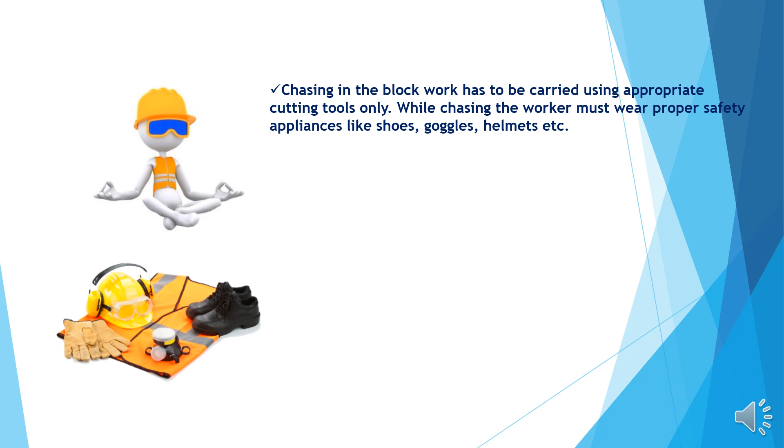Chasing in the block work has to be carried out using appropriate cutting tools. The worker must wear safety appliances like shoes, goggles, helmets, etc. Throwing of debris from height is strictly prohibited.

Before commencement of block work in front of a lift shaft, a safety permit should be taken. CT props to be fixed in front of the lift shaft to tie the safety belt. Hard barricading to be cut only by gas cutting. Personal protective equipment should be used properly.

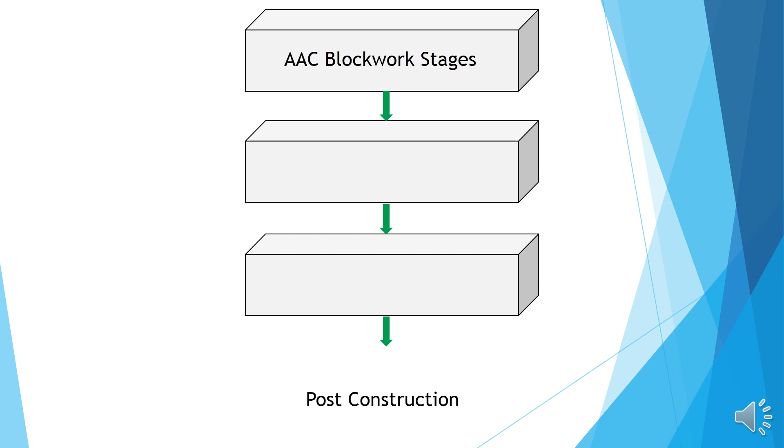AAC blockwork stages: pre-construction, during construction, and post-construction. Pre-construction consists of the following activities: material selection, shop drawings, material management, workman training, and preparation.

Cement, crushed sand, water, AAC blocks, block adhesives - these are all the materials required for doing the AAC block work.

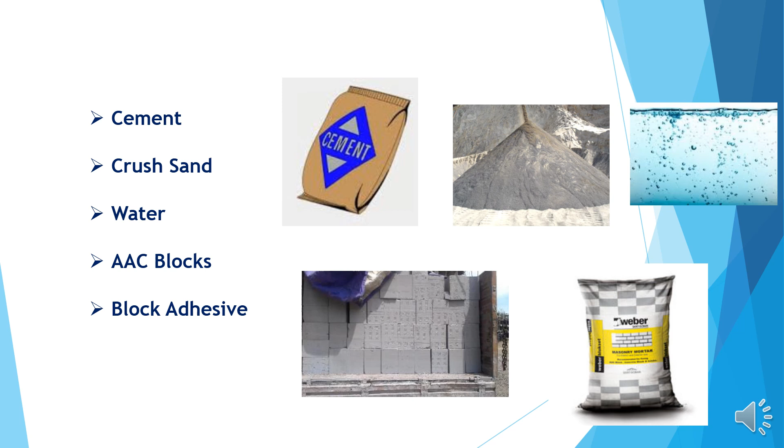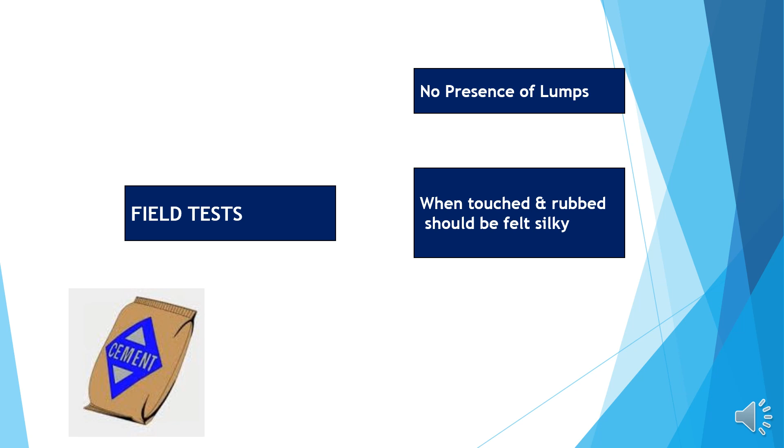Field test for the cement: no presence of lumps should be there. When touched and rubbed, it should be silky. When thrown in water, it should not immediately sink, it has to float for a while.

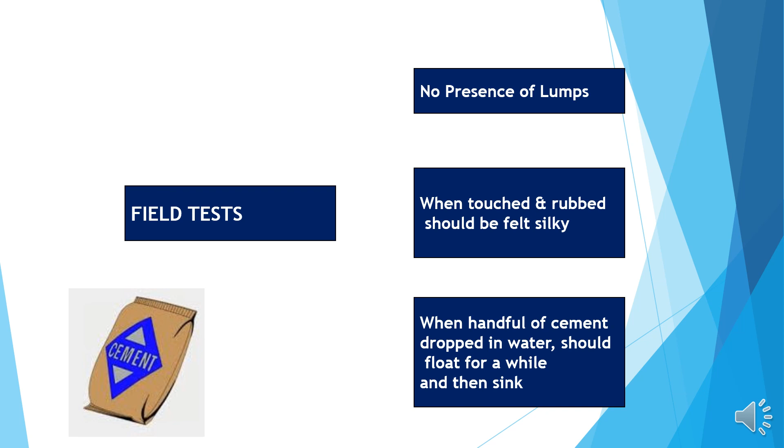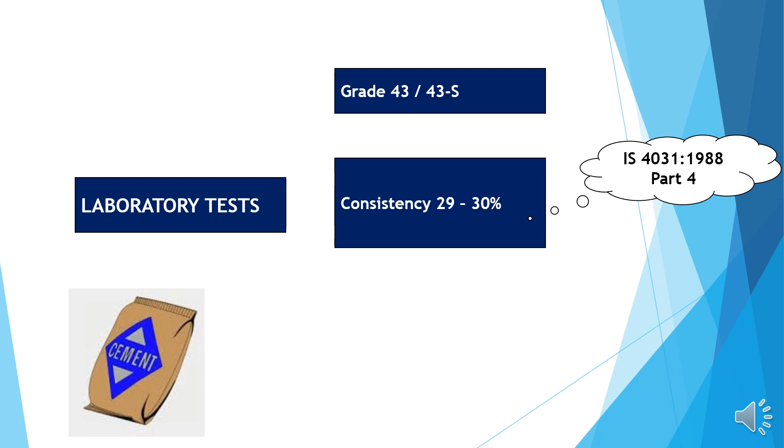Cement laboratory test: Grade 43S. Consistency 29 to 30%. Refer IS 4031 Part 4. Initial setting time not less than 30 minutes, and 60 minutes for 43S. Final setting time not more than 600 minutes. Refer IS 8112 Clause 6 Table 3.

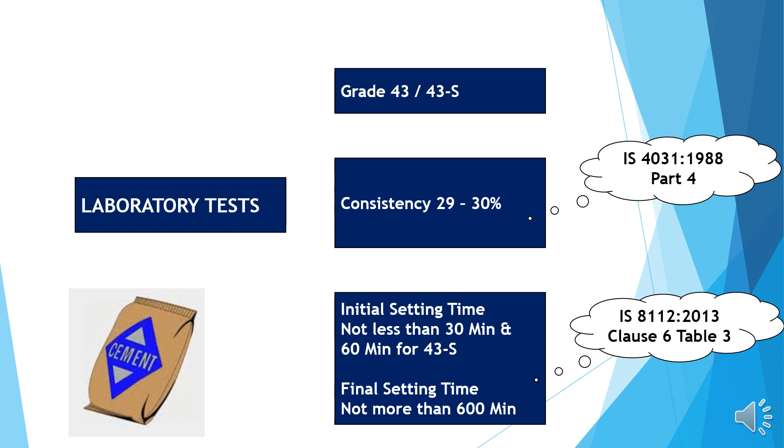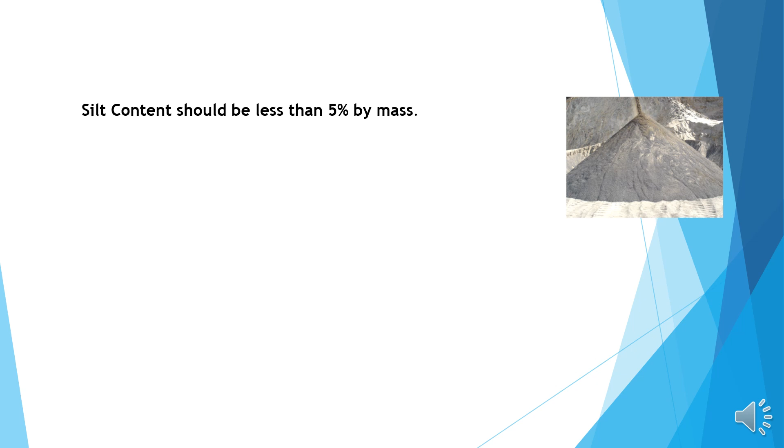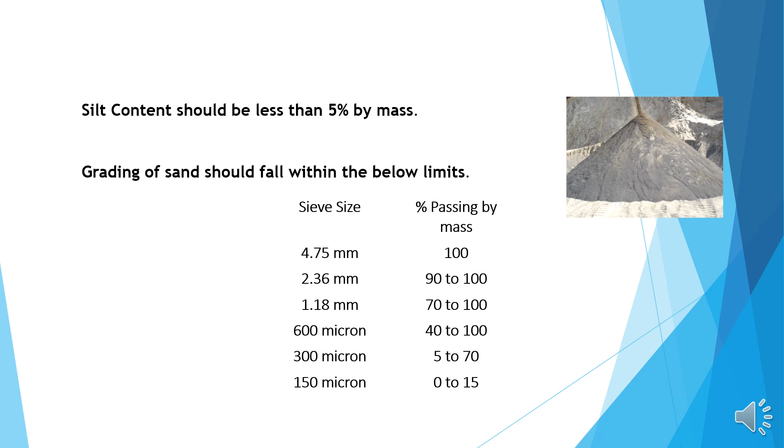Silt content should be less than 5% of the mass - this is crushed sand. The silt content should be less than 5% by mass. Grading of the sand should fall within the below limits: Sieve sizes 4.75mm 100%, 2.36mm 90 to 100%, 1.18mm 70 to 100%, 600 micron 40 to 100%, 300 micron 5 to 70%, 150 micron 0 to 15%. Relevant IS code is IS 2116.

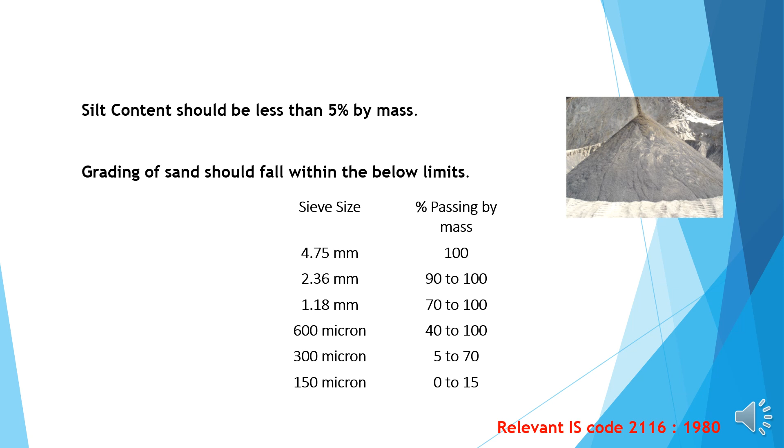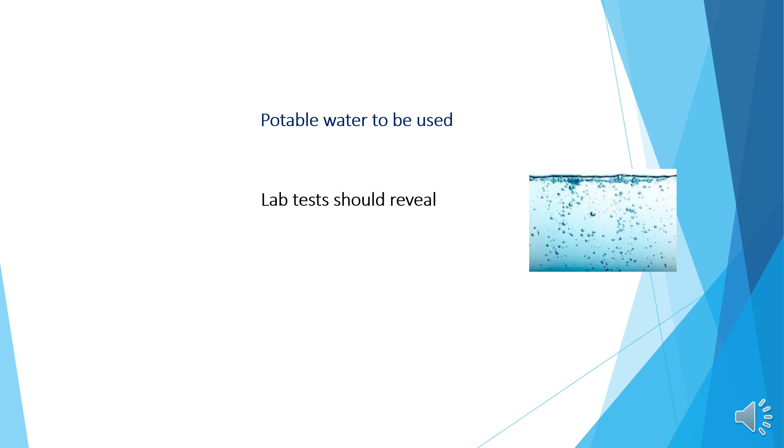Potable water to be used. Lab test should reveal pH value not less than 6, chlorides 2000 milligrams per liter, sulfates 400 milligrams per liter. Relevant IS code 456, Clause 5.4, Table 1.

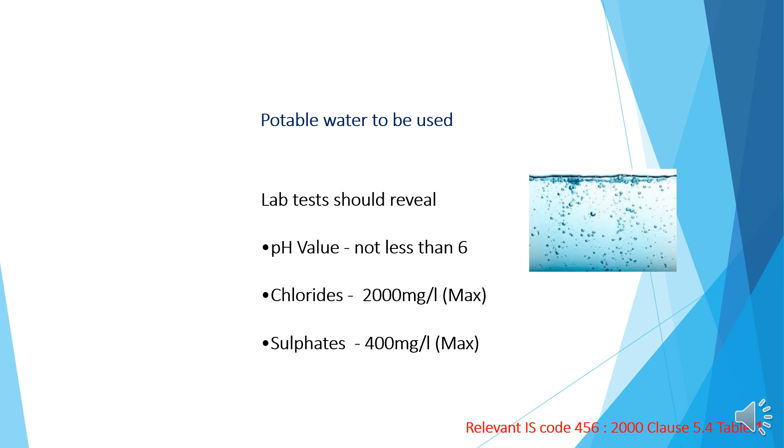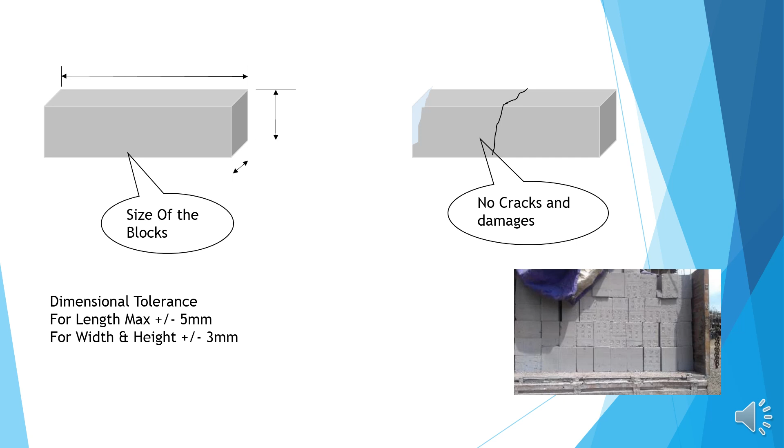Size of the blocks - dimensional tolerances for length maximum plus or minus 5 millimeters, for width and height plus or minus 3 millimeters. No cracks or damages should be in the blocks. Relevant code IS 2185 Part 3 Class 3.

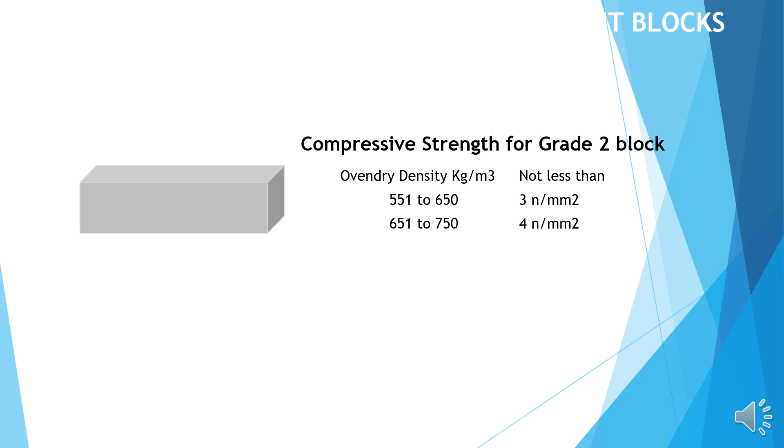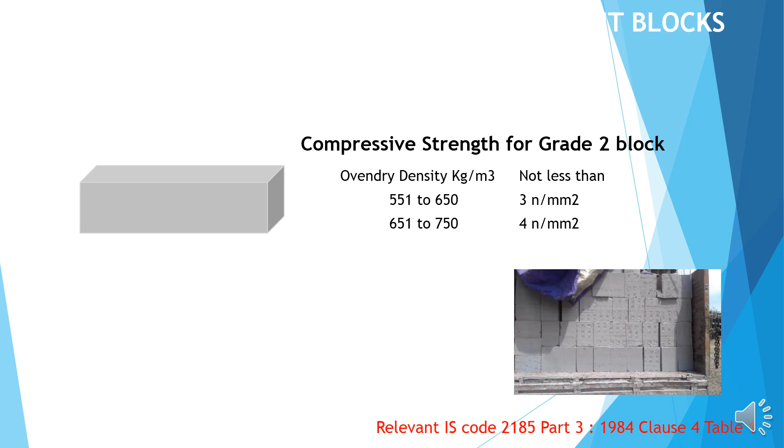T blocks - compressive strength for a grade 2 block of oven-dry density: 551 to 650 kg per cubic meter will be 3 newton per millimeter square, 651 to 750 kg per cubic meter will be 4 newton per millimeter square. Relevant code IS 2185 Part 3 Clause 4 Table 1.

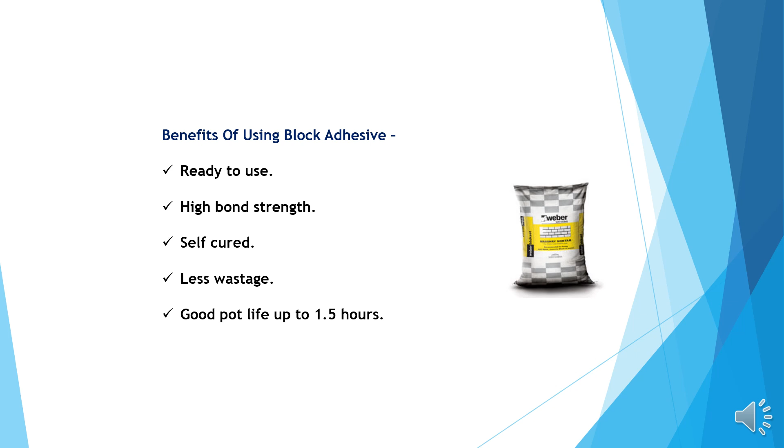Adhesives - benefits of using block adhesives: ready to use, high bond strength, self-cured, less wastage, good pot life of up to 1.5 hours, and increases the speed of construction.

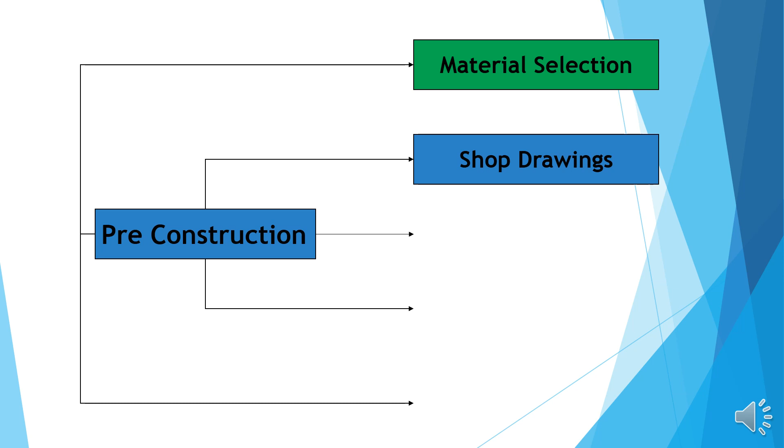Now I am coming to pre-construction: material selection, shop drawings, material management, workman training and preparation.

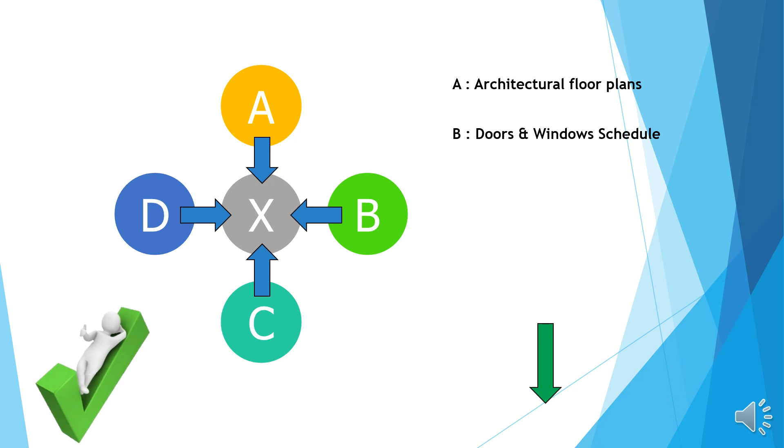A indicates architectural floor plans, B indicates doors and window schedule, C indicates MEP coordinated services, D indicates specific details, and X indicates shop drawings of AAC block work, which is to be approved and stamped.

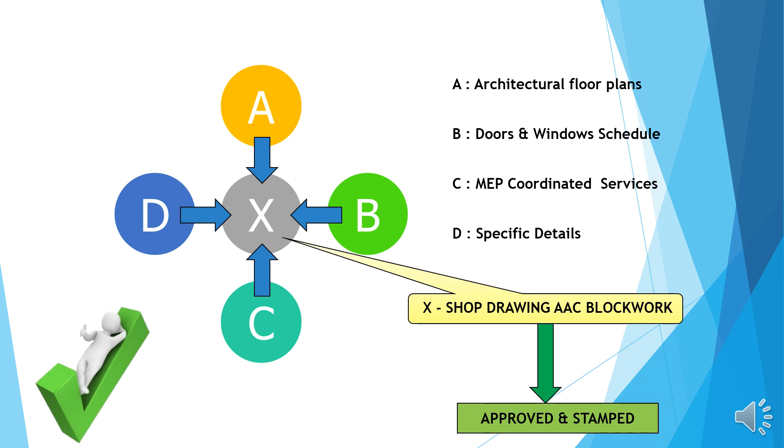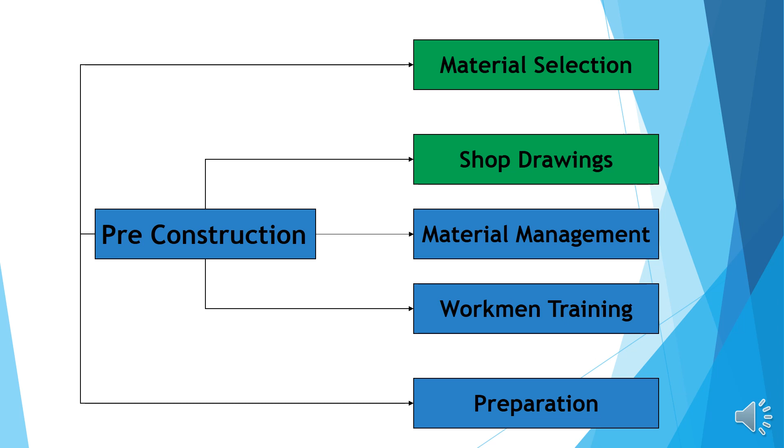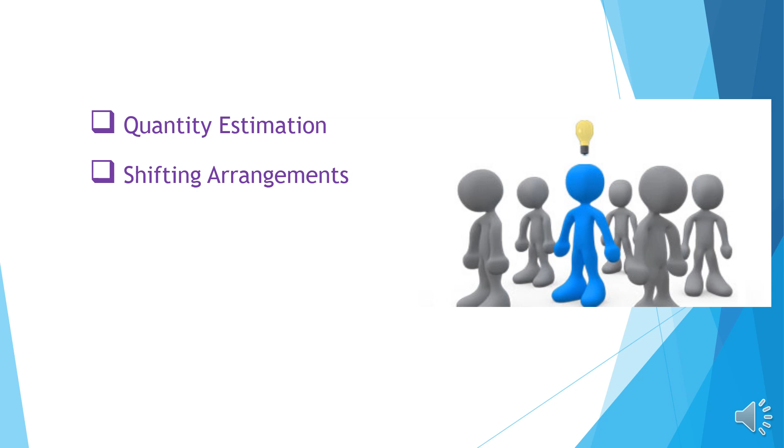Pre-construction, which I already explained: material selection, shop drawings, material management, workman training and preparation. Quantity estimation, shifting arrangements, mortar mixing equipment, scaffolding arrangement - all these things have to be carried out before the commencement of the block work.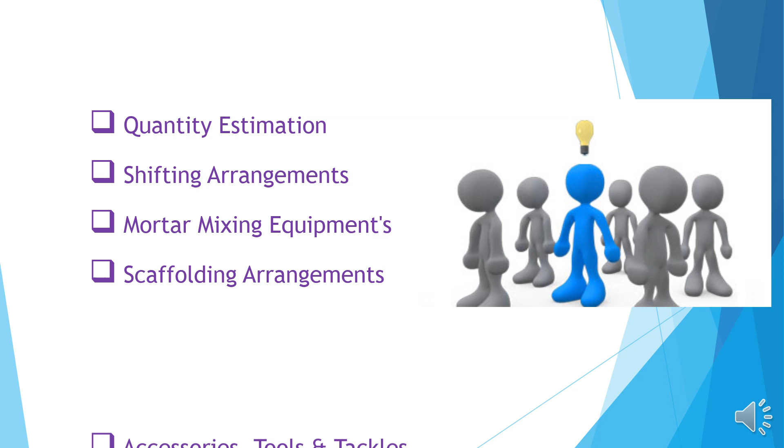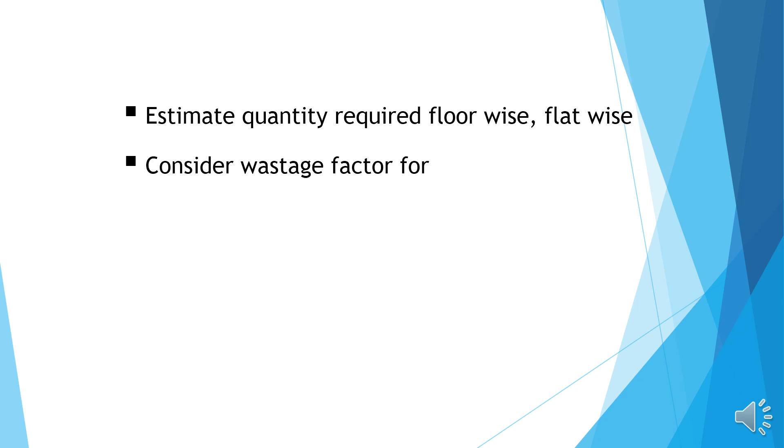Accessories, tools and tackle. Estimate the quantity required floor-wise, flat-wise. Consider wastage factor for material handling, cutting, etc.

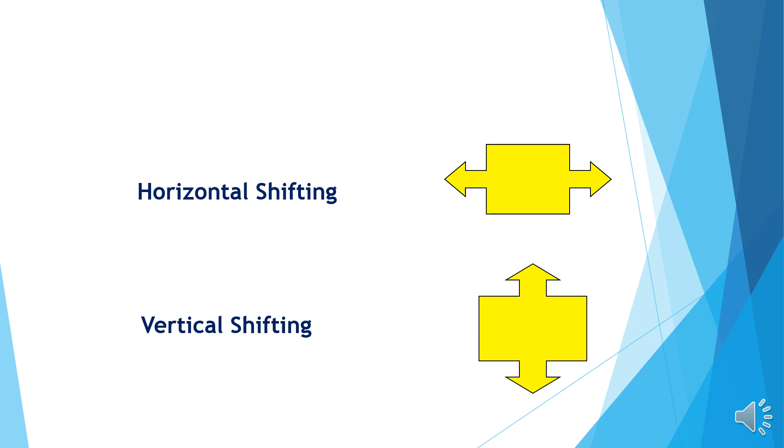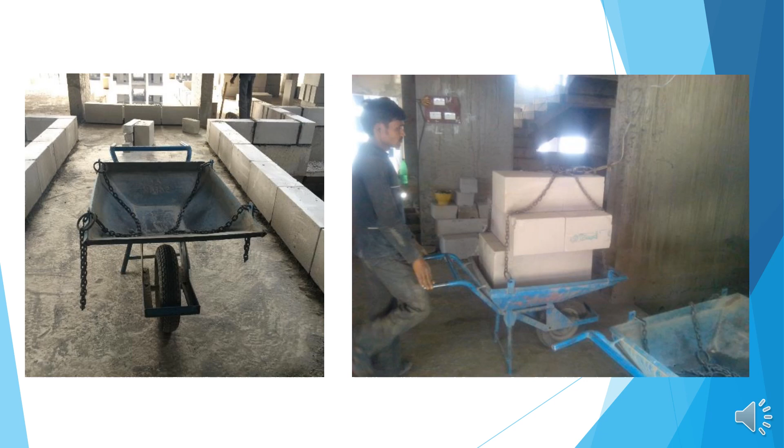Horizontal shifting - the material shifting in horizontal shifting shall be done like this. Vertical shifting is what I mean by this. The images of horizontal shifting have been shown here - this is the methodology of horizontal shifting. When I say vertical shifting, this is the methodology of doing vertical shifting. Again, one more image showing the vertical shifting.

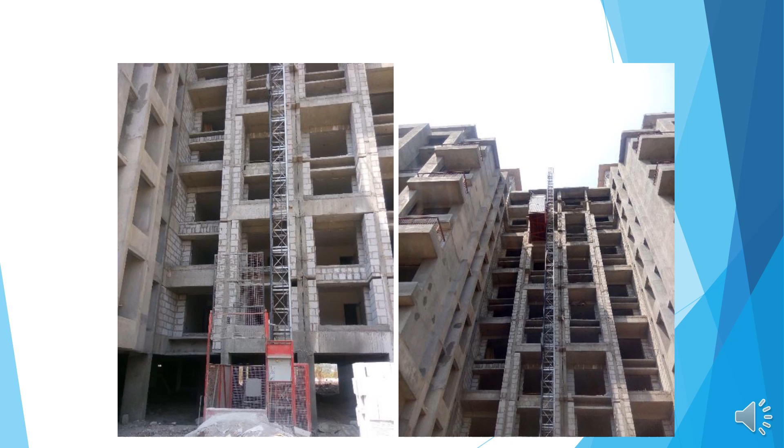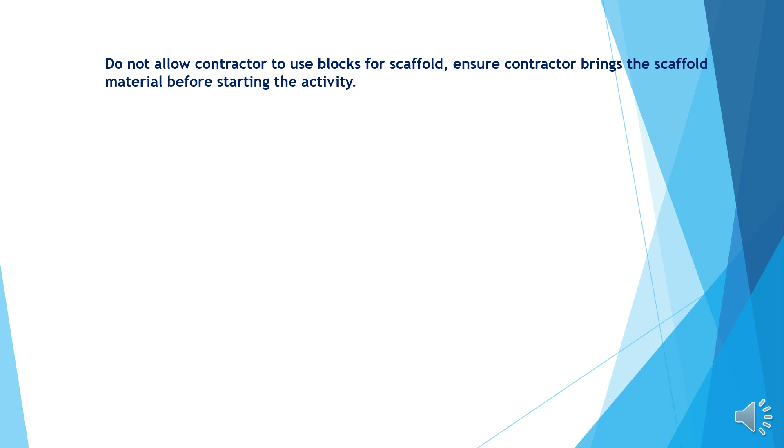Do not allow the contractor to use blocks for scaffolding. Ensure the contractor brings scaffold material before starting the construction activity. This type of scaffolding is not at all permitted. Please ensure that none of your laborers are using it like this, as it may cause damage to the workers as well as the blocks.

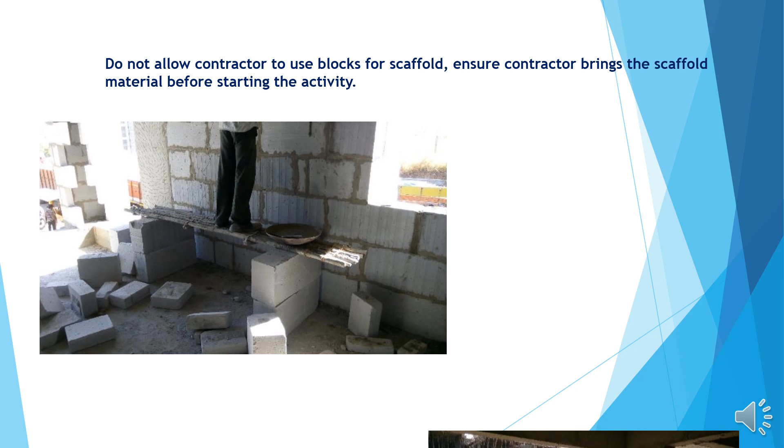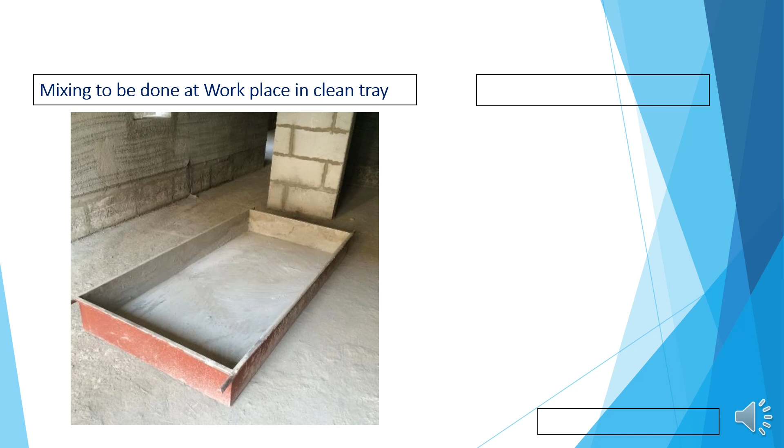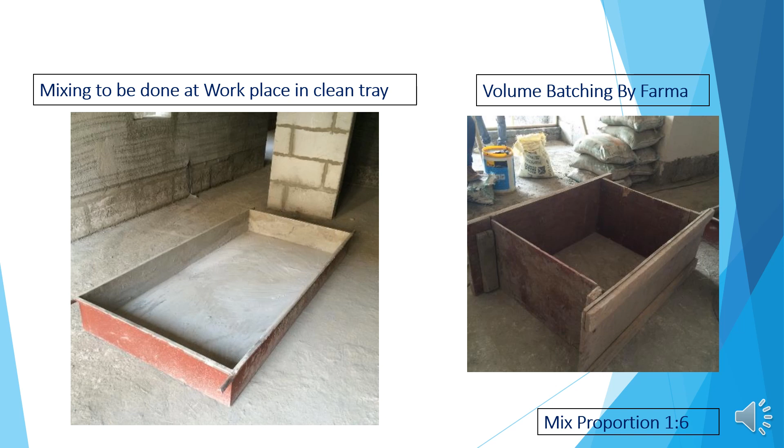Mixing to be done at the work place in a clean tray. This image shows how mixing has to be done in the clean tray. Volume batching by farma - this is the measurement box through which only volume batching has to be carried out. Mix proportion is equal to 1:6.

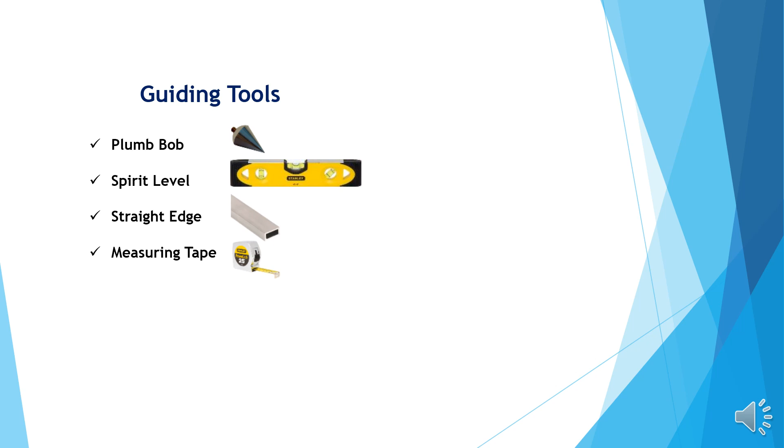Guiding tools: plumb bob, spirit level, straight edge, measuring tape, tube level, tri-square.

Usage of these tools: mason trowel and adhesive trowel, 12mm thick ply pieces, block cutting machine, wooden float, hammer and chisel, spade and shovel, wire brush, and gamela or tray.